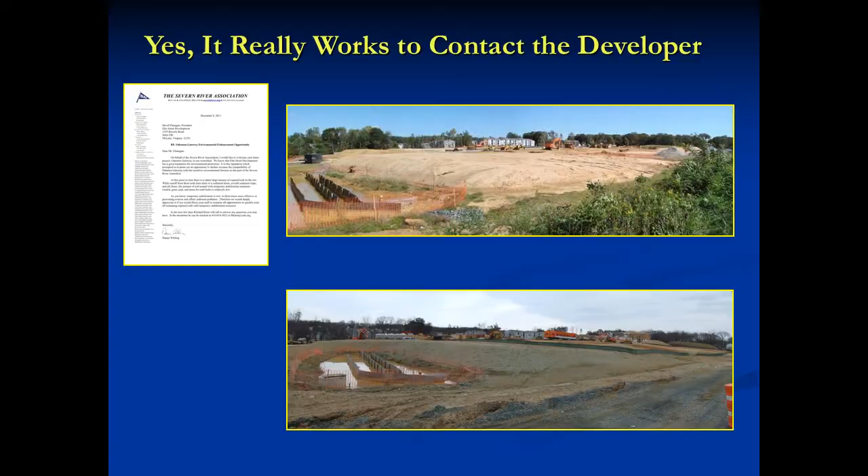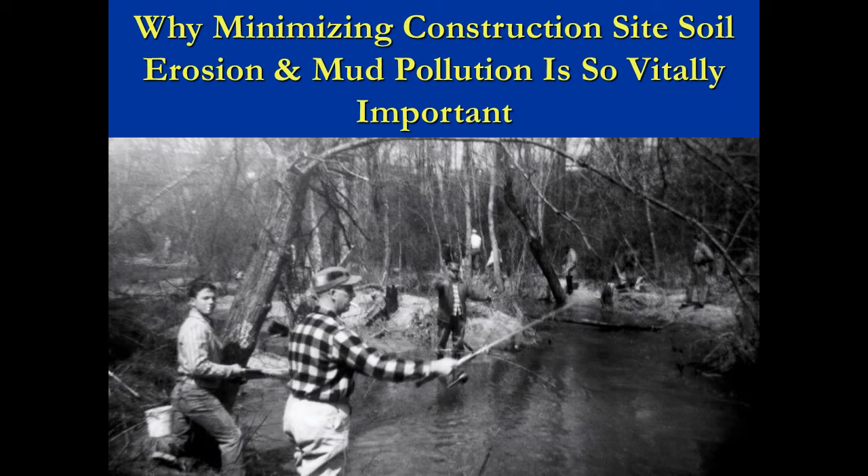Nothing illustrates the impact of construction sediment better than this 1960s photo of Severn Run taken just upstream of the site, which is outside of Annapolis, Maryland. Every spring, countless yellow perch would spawn in Severn Run. The fish were so plentiful that the stream surface was continuously scaly backs from bank to bank. You would see long streamers of yellow perch eggs hanging from every aquatic plant, stick, or other submerged object. Today, yellow perch still enter Severn Run, but few of their eggs hatch or survive to adulthood.

A storm occurred one spring in the late 1960s while a new bridge was being built over Severn Run. So much mud washed into Severn Run that an estimated 100 million yellow perch eggs were killed. Just one relatively small construction site and a single storm did all this damage.

The reason why sediment was so deadly is the sticky coating on the surface of yellow perch eggs. This sticky coating allows the eggs to attach to objects, which prevents them from floating downstream. But sediment suspended in water also sticks to egg surfaces. In the case of the Severn Run disaster, egg surfaces were completely coated with sediment. The developing embryos then suffocated.

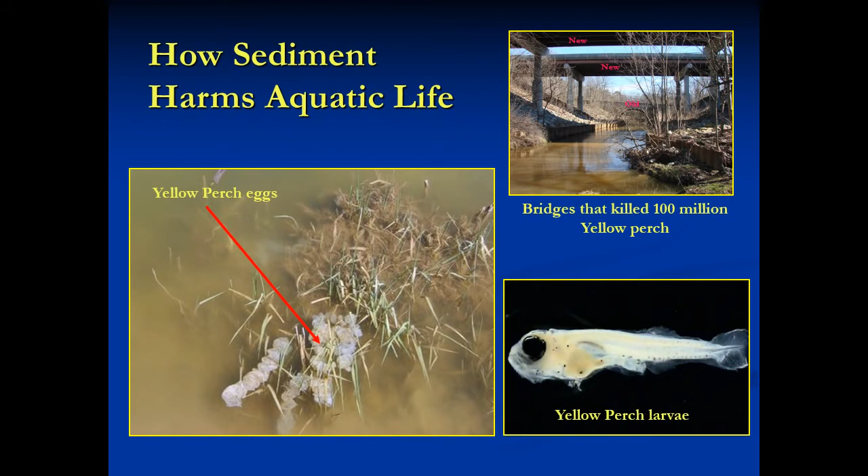And the damage is not confined to fisheries. Sediment blocks sunlight from penetrating the water column and is a major reason for the decline of submerged aquatic plants. Of course, these plants are vital to ecosystems like that found in rivers, lakes, and the Chesapeake. Sediment deposited along river channels can rob flood storage capacity and cause formerly safe roads or homes to be inundated come major storms. Sediment also adds to water treatment costs and makes it more difficult to treat water to a level suited for human consumption.

And of course, sediment fills in boating channels, marshes, and other aquatic habitats. We estimate that for every dollar spent keeping sediment out of waterways, we all save $100 in damages avoided.

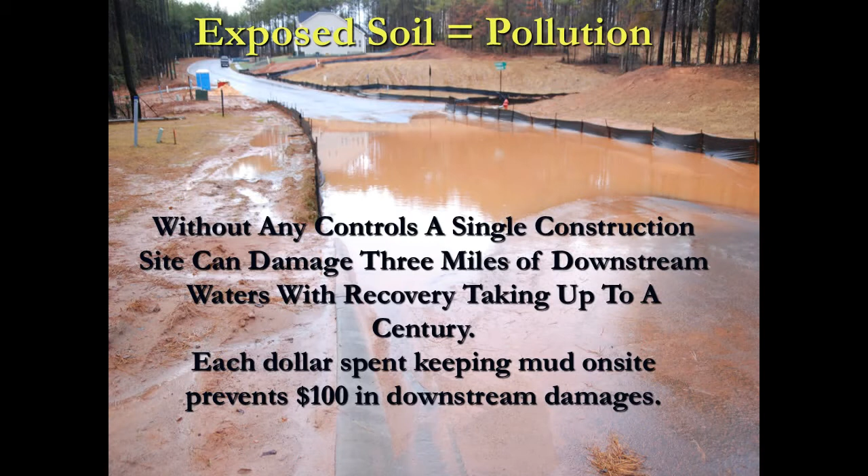The reason for this emphasis on mulching and seeding is that exposed soil equals pollution. Based on a vast amount of scientific literature, the only way to protect aquatic ecosystems is to ensure that disturbed soils are protected or stabilized from erosive forces. Stabilization reduces off-site sediment pollution by 90 to 99%. Perimeter controls like the failing black silt fence you see here can retain a third to half the sediment on site. So if you see exposed soil on a construction site, pollution of nearby waters will likely occur come the next major storm.

So here's how erosion sediment control is supposed to work. You begin with an undisturbed site like that on the left. The only clearing done is a narrow swath along the downhill edge of the site, which is indicated in the right photo by the earth-colored line. The red arrows show the direction of runoff flow, downhill of course.

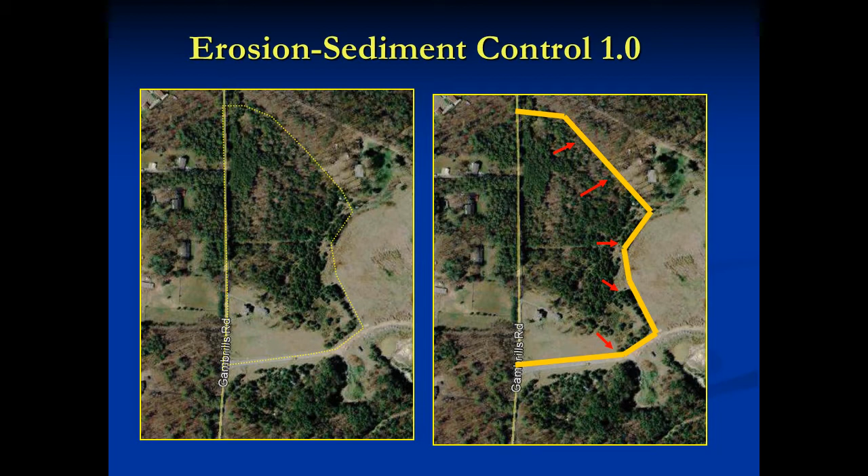Here we see a sediment trap. Note the muddy water in the trap. This is caused by clay particles which take a long time to settle. As a result, most don't settle, so you see muddy water flowing from a trap that is working just fine. But if the area draining to the trap is well stabilized with a thick layer of mulch or a dense growth of grass, then you shouldn't see much in the way of muddy water leaving the site. In other words, muddy water may signal exposed soil somewhere on the site.

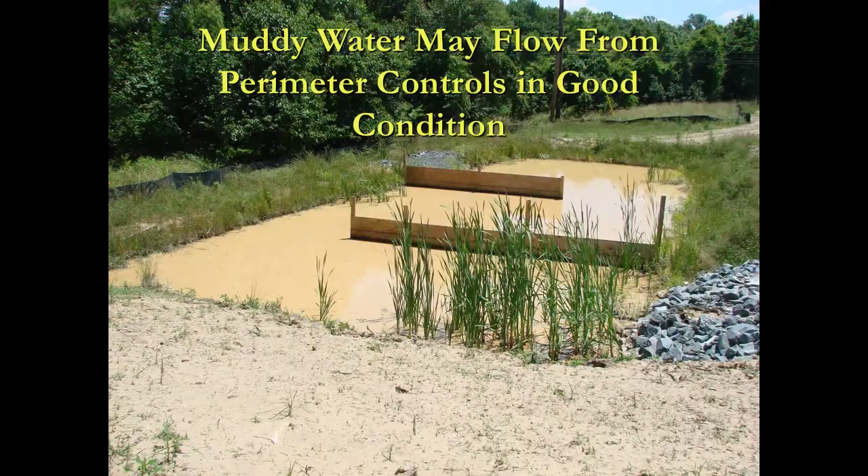Once perimeter controls have been installed and stabilized, all plans will call for quickly bringing the interior of the site up to the point where building may begin. This point is known as rough grade. Here we see a hillside in the upper right before grading. Through cutting, filling, and grading, the hillside is leveled out and brought to the elevations where road, parking lot, and building construction can begin, along with utility installation. Once rough grade is reached, you'll see building foundations appear along the road, along with road or parking lot beds.

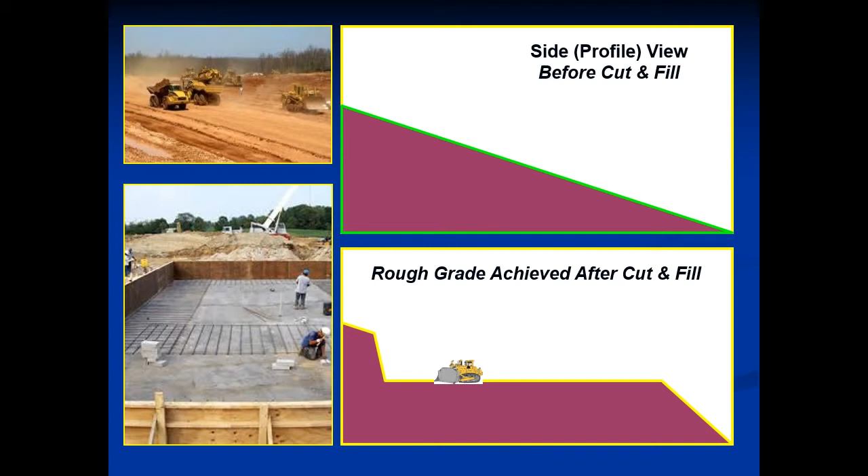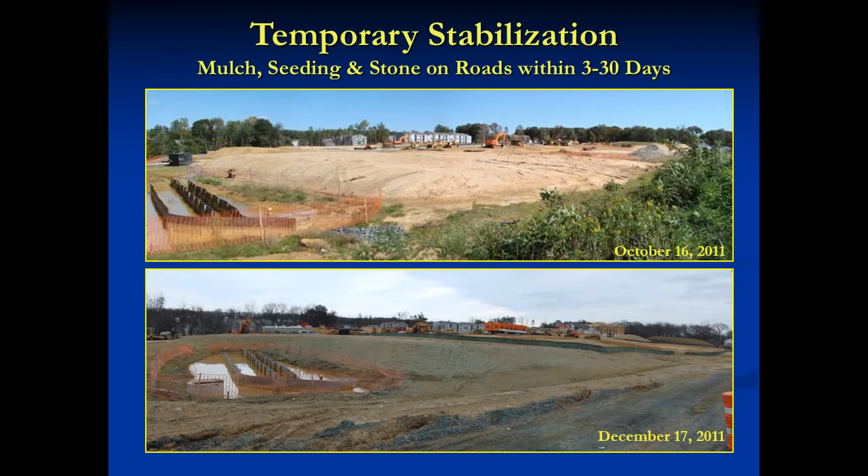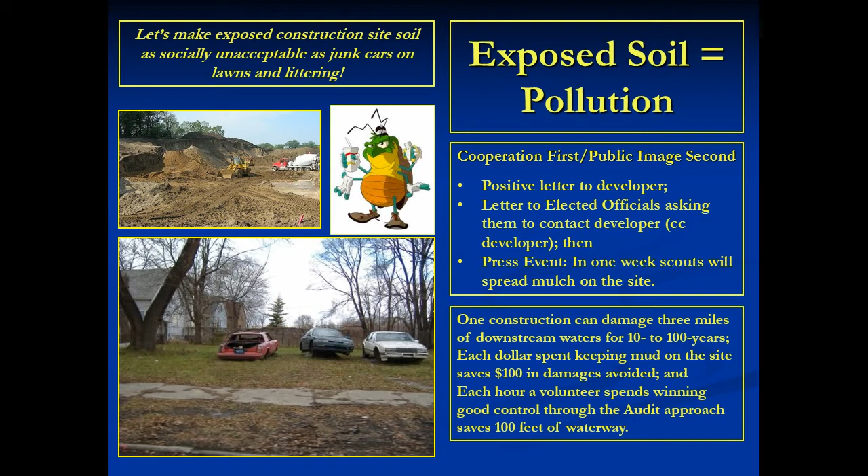It's our hope that with your help we can establish a widespread public perception that exposed soil equals pollution. In other words, we hope that when people see exposed soil on a construction site, they'll think pollution. We hope that eventually exposed construction site soil will evoke the same reaction as junked cars on lawns or littering. Once ES=P becomes a widely held perception, voluntary compliance with construction site stabilization requirements may become as common as voluntary participation with curbside recyclables collection or keeping lawns mowed.

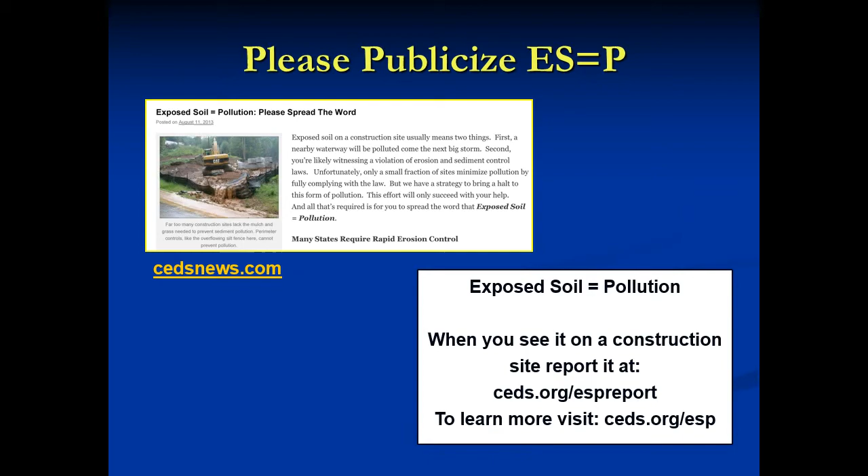Okay, now as to the specifics of what we'd like you to look for on construction sites. Again, this will not require trespassing onto the site, so there's no need for hard hats or bail money. You should be able to see everything you need from public areas adjoining each construction site. These areas include streets, adjacent parking lots, stores, shopping centers, and other places that are open to the public.

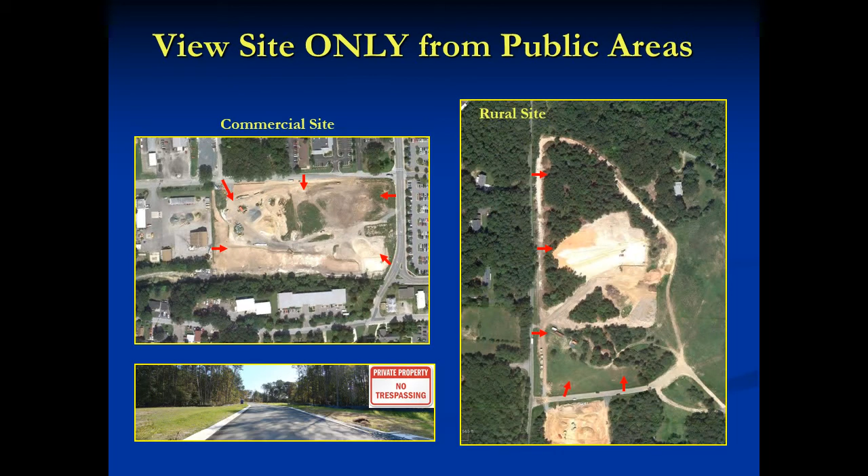Frequently, you can make out the site boundaries on aerial photos even when they predate site clearance. You can then measure site area from the photo.

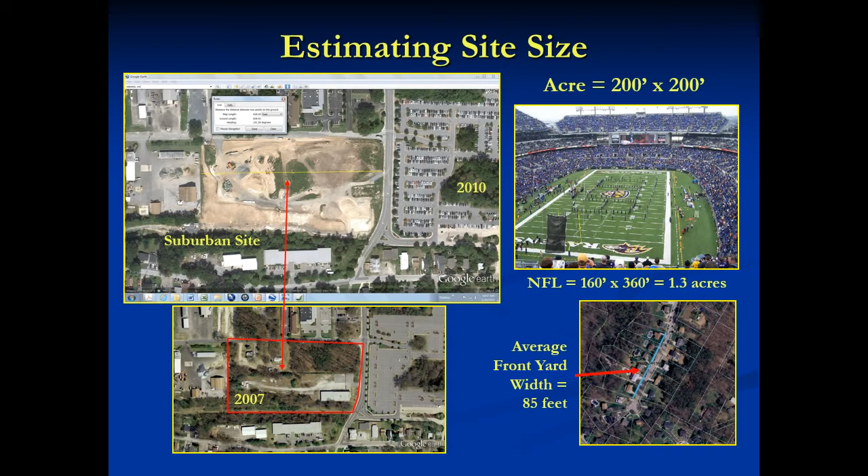Now we're ready for the most important task. As you look at a site from each vantage point, estimate how much is exposed soil. In other words, of the area that was originally disturbed, what percentage is soil lacking any vegetation, mulch, or other measures stabilizing erosive forces? Here, our commercial site is bounded by a solid red line. The line marks the original limits of disturbance.

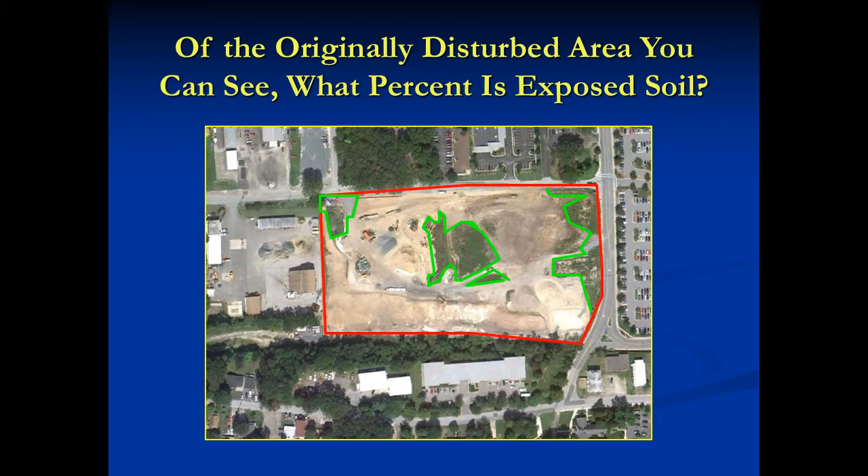However, the vegetation appears thin at points within each of the areas outlined with green. It's hard to tell from this aerial photo just how much of the stabilization is thin. This is better determined on the ground.

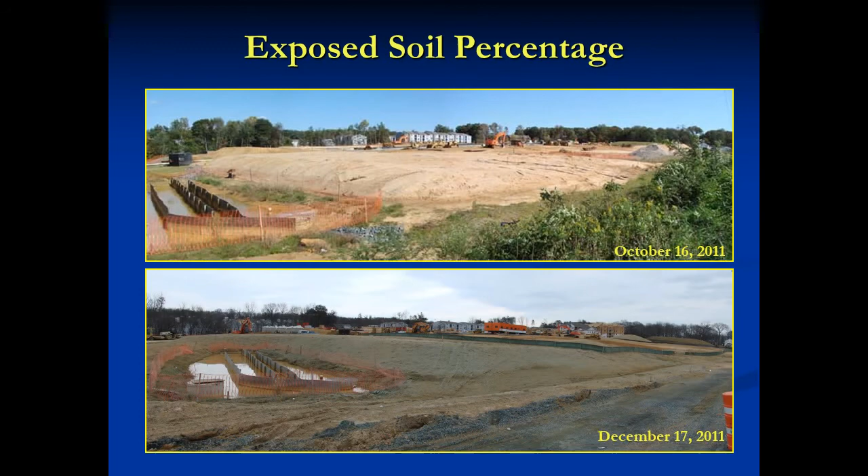To stabilize exposed soil from the erosive forces of water and wind, measures must be applied in ways that fully protect soils from these forces. For areas outside of roadbeds, parking lots, and building foundations, stabilization takes the form of mulch and seeding.

When the ground is frozen, it may be prudent to apply just mulch, but seed must be applied as soon as the ground thaws. The reason for seed is that mulch is temporary, and a dense growth of grass is far more effective in preventing erosion.

Stabilization is usually achieved by applying a temporary layer of straw mulch, then establishing grass on areas not slated for disturbance in the near future. The mulch must be thick enough to obscure underlying soils, then reapplied as straw degrades.

A vegetative cover, usually grass, must be established in areas that won't be disturbed for a while. The vegetation should then achieve a 95% cover within 4 to 8 weeks during the growing season, which is March to October.

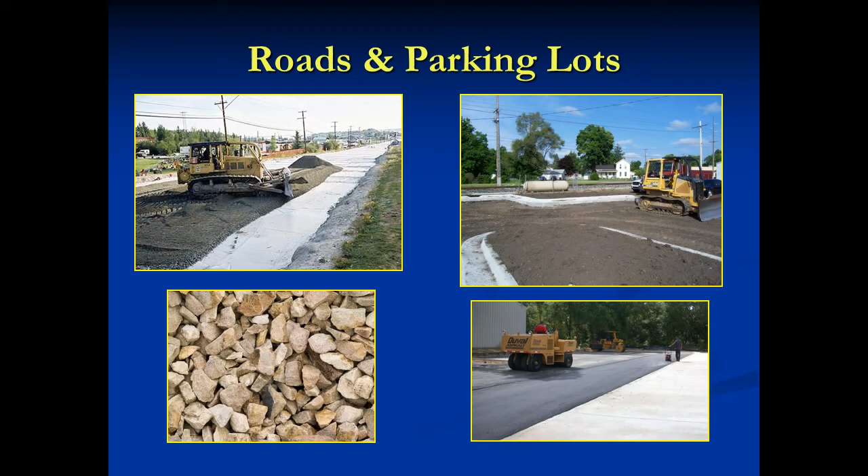Now that we're nearing the end of this presentation, let's summarize. Initial clearance should be limited to a narrow swath along the downslope perimeter. Perimeter controls like silt fence, earth berms, and sediment traps should be quickly installed, then stabilized. During the growing season, March to October, grass should achieve a dense cover within 4 to 8 weeks, otherwise another seeding is needed.